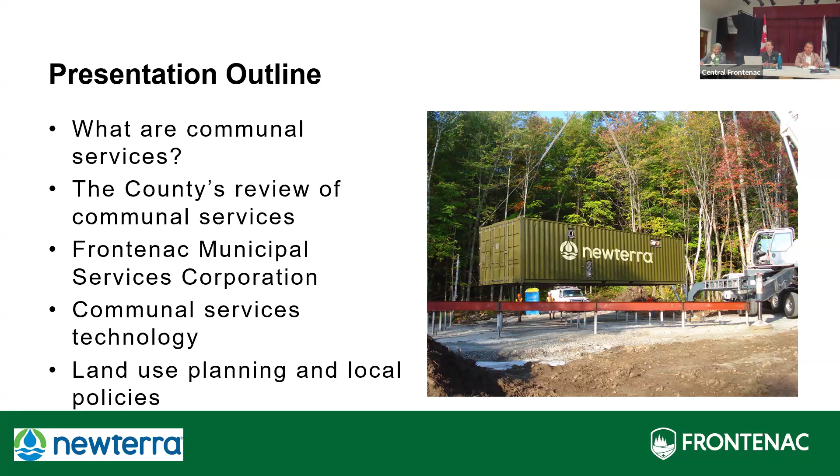I'll turn it over to Brad, who is actually here to talk about the technology itself and how it works. And then our last few slides are going to circle back, and we're going to talk about how we use this from a land use planning perspective and a community building perspective, and the kinds of things that Central Frontenac needs to think about in terms of how it could use this technology in the future.

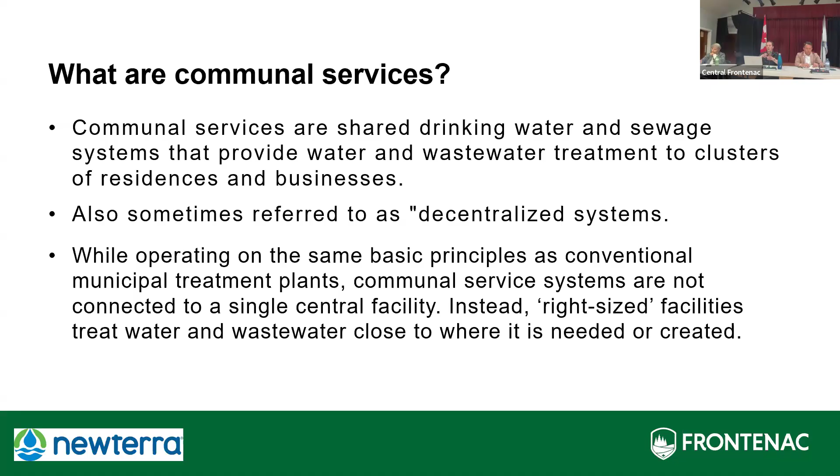So to start off, in terms of what communal services are: communal services are basically shared drinking water and sewage systems that provide water and wastewater treatment to a cluster of residences or businesses. They're also sometimes referred to as decentralized services. They operate on the same basic principles as your traditional or conventional municipal treatment plants, but they're not connected to a large single facility. Instead, they're called right-sized facilities that treat water and wastewater close to where it is needed or created.

Communal services can be less expensive than centralized municipal services, and it reduces the cost of needing to pipe water or wastewater over long distances. They are also more environmentally friendly than your traditional private on-site services, such as an individual septic system.

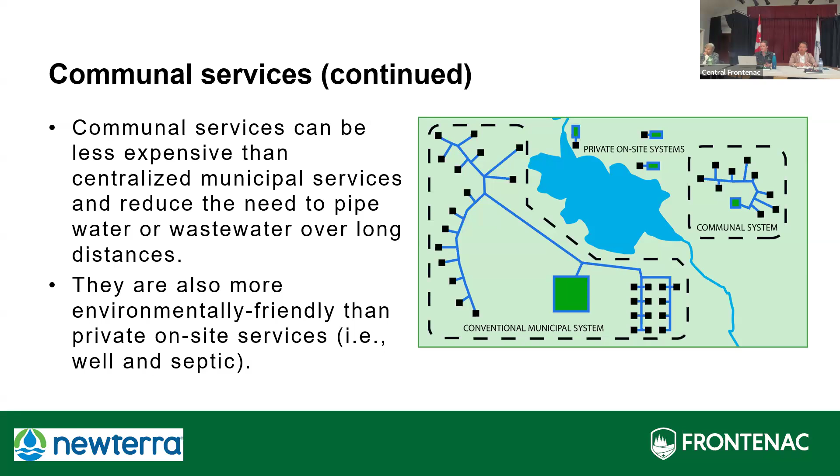So why pursue it? This quote here comes from the County of Frontenac's official plan: the lack of municipal services in our villages challenges the future community viability of those villages. In our villages, we don't have any traditional municipal water or sewer services, save one exception. The village of Sydenham does have piped water, and that came about because of an order from the Ministry of Environment about 25 years ago.

But that's the only sort of piped service that we currently have anywhere in Frontenac. Our historic settlement areas, our villages and hamlets, have building lots like here in Sharbot Lake that are very small. But the modern standard today for a new house with a well and a septic system is to have it on a lot that is at least 2 acres in size, or 0.8 of a hectare.

Our villages and hamlets are also where a lot of our commercial assessment, all of our businesses are located, and a lot of our community services, such as our schools and medical centers. To do traditional municipal services would be a significant public infrastructure investment that, honestly, is too much for our townships to be able to afford.

So the county, over the course of the last 9 years, has been looking into the issue of communal services and reviewing the technology, the policies, the regulations, and the governance models that can be used in order to see whether we can leverage this as a tool to help build and sustain our communities.

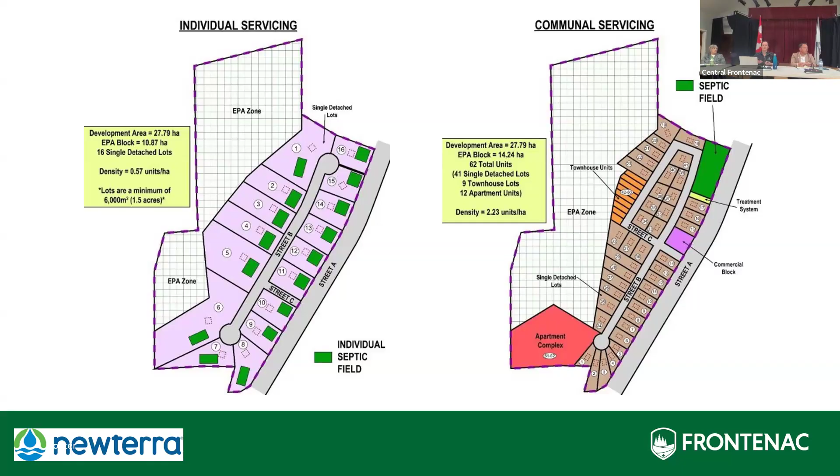In the top right-hand corner is where the communal septic field and septic system would be located for that entire development. So that's just an example we use, based on a real-life site and development, in terms of how we could redevelop it on communal services.

Essentially, in terms of how it all works, there are three main pieces. The first is governance and operations: how is this all working, who is watching over it, who is looking after and taking care of everything. There's the technology itself, which Brad will speak to. And then there's the land use planning: how do you want to use it in your community, where do you want to use it, what do you want to get out of it, what types of housing do you want to get out of it. These are the three main pieces we'll touch on in the remainder of the presentation.

In terms of governance structure, there was a second part to the study the county worked on with WSP, looking at the best way to oversee how this could be done in our community. Their top recommendation was the use of a municipal service corporation. The reason for that, as Brad will explain, is that this technology has been around a long time, it just hasn't been used very often in Ontario yet.

What happens is when a private developer wants to build with communal services, particularly involving permanent residential homes, the province requires what's called a municipal responsibility agreement, or an MRA. These are required when the development will be privately owned and operated, and they're basically a legal agreement between the municipality and the developer or site owner, who could be one person or a condo corporation of people. Basically, it provides oversight at the municipal level for how everything is going to operate.

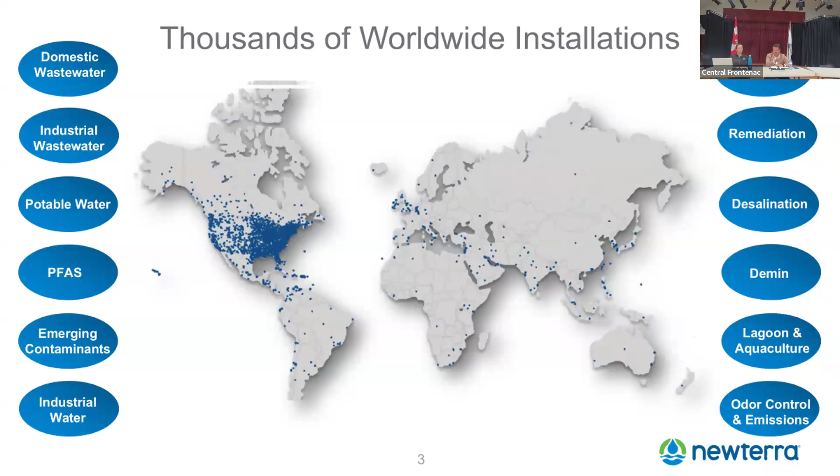We've been doing this for a while, and as you can imagine, over the years companies acquire other companies in water, which we've done. We've accumulated a lot of installations, a little over 10,000 or 20,000 actually installations globally. We have over 100 installations in Canada with sewage treatment, the one I'm going to talk about today, and double that in the US.

So the challenge in Ontario specifically is we've had a surge in population. We have all kinds of water infrastructure that's designed around centralized water treatment. What that means is you have one wastewater plant, as Sonia alluded to. In Kingston, there's a wastewater plant, and pipes go out and collect all the wastewater and bring it back to that plant, and then it treats it and discharges it to Lake Ontario.

So that's what we call a centralized infrastructure, and our province is set up for that. Unfortunately, we're growing at a fast rate, and it's very expensive to expand and grow centralized infrastructure, which is why decentralized, as Sonia was saying, or communal, another way to say it, is another tool in our toolbox for Ontario to help us maintain growth and build out the province.

And the nice thing about being able to have decentralized in Ontario, we have lots of beautiful places to live, and it would be really nice to be able to live in a community like this and be able to grow and have affordable homes for our future generations.

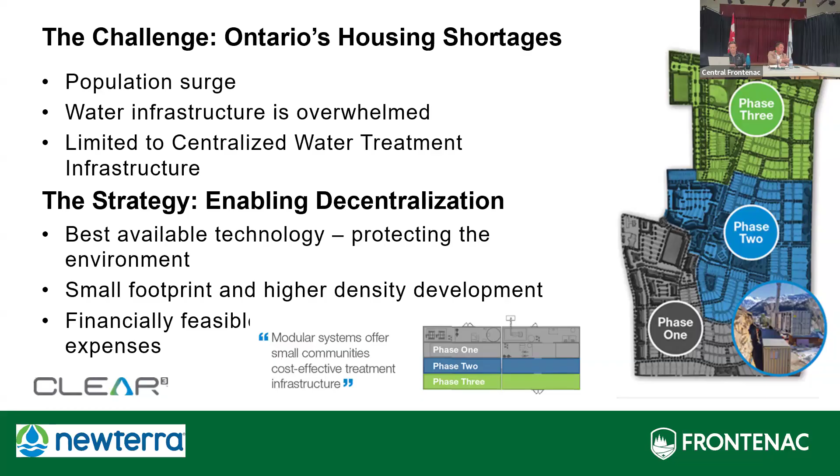I mentioned we have a lot of installations. These are our sewage and some are drinking water systems, most of them are sewage. So we have over 40 ECAs. It's an acronym I'll touch on real quickly, but it stands for Environmental Compliance Approval.

And that's regulated by the province. Basically it's a permit to have one of these plants put on a site where you can treat the water and create a very clean, reusable effluent that goes back into the environment. There's lots of rules and regulations around that and how those permits are given out and how you can achieve to get one. These systems can be owned by a community, by a municipal corporation, by a private developer, a condo corp. So it does vary on ownership. There's lots of options there.

Getting where the mouse is. Oh, is it there? Where do I shoot for this? There's a box right under the screen. Need a laser. Frozen. Can you force it forward? There we go.

I throw this picture in just to give you a little idea of flow. So it's important to understand what we're talking about when we're talking about communal systems. These are not mega plants. These are not $100 million wastewater treatment plants that are going to service the city of Kingston or Brockville. This technology has been around for decades.

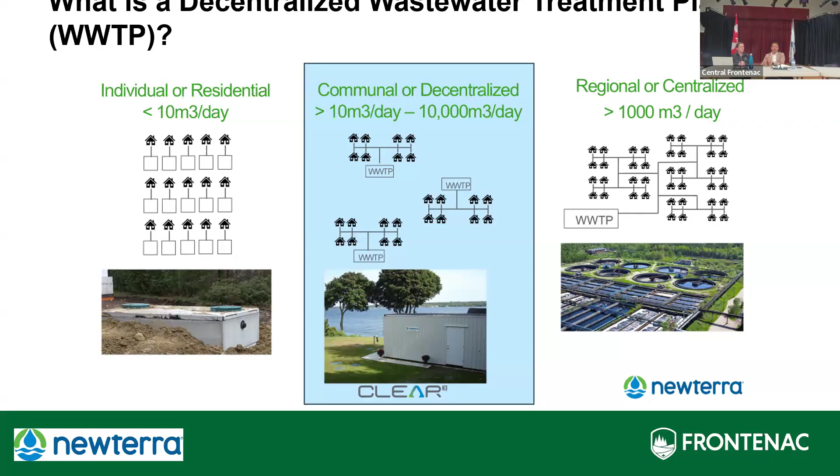So we've taken an existing technology that's been proven, is in operation today globally. It's accepted by regulators globally, and I'll get into the reasons why. And basically we've just scaled it down and put it in a smaller footprint and made these to be built in a factory so that we can ship them out and modularly put them together so that they can scale up with the developments as communities grow over time. Instead of going in and building a $100 million plant, you can put in a small section of a plant and then add sections as years go by to grow that as the community grows and houses are getting built.

This is a picture of a 500 home MBR wastewater treatment plant located near London, Ontario, in a township called Southwold Township, with a brand new development of 500 homes. The system sits down in a valley with a footprint of about 40 feet by 60 feet, plus it's got a little generator off to the side. There's a creek off to the right of the screen that works its way to Dodge Creek, and then out to Lake Erie.

So what happens is the 500 homes have a traditional collection system. You flush the toilet, it goes through a drain, and comes into the system into a tank. From there, we take that wastewater, that sewage, and treat it, turning it into reusable clean water that literally looks like that. We discharge it back into the environment, into the waterways, and it's actually cleaner than the waterways.

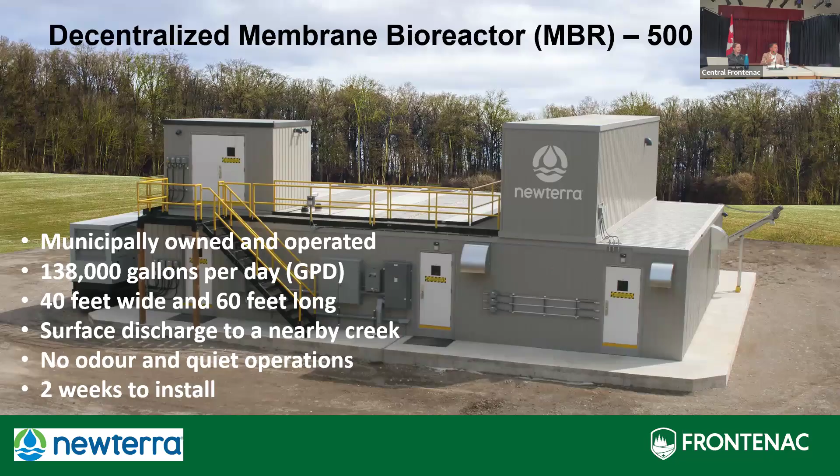The advantages of these package systems being built, as I said, is that they're scalable. It goes together in a few weeks because it's built in a factory, and they are very cost effective when you compare them to septic systems.

Now you might ask, what makes these systems robust? What happens if something breaks or discharges sewage to my precious waterways? Well, that is something that's not acceptable. And the way that is ensured is through multiple levels.

At the very top, we have the province, the Ministry of Environment, Conservation and Parks, the MECP. They issue something called environmental compliance approvals for these facilities. Every single facility in Ontario has its own environmental compliance approval, and one can't be installed without getting that permit. It takes over a year to get the permit, and what the permit does is dictate what the water quality is going to be, what flow rates of water.

So how many homes, are we talking 10 homes or 500 homes? What technology are you using to treat the water? I'm actually talking about the best available technology on the market, not just because it's Newterra's - MBR is not Newterra's technology. This is a generic technology that's been around for decades, but we've adopted it and put it in a smaller form factor.

But if you ask any regulator globally - the US, California, Ontario, or Singapore - they will tell you MBR is the best available technology for treating sewage, period. The reason it's the best is its effluent quality, the output of our system. As an engineer I always use technical words, but basically the output is clean water that we're putting back into the environment.

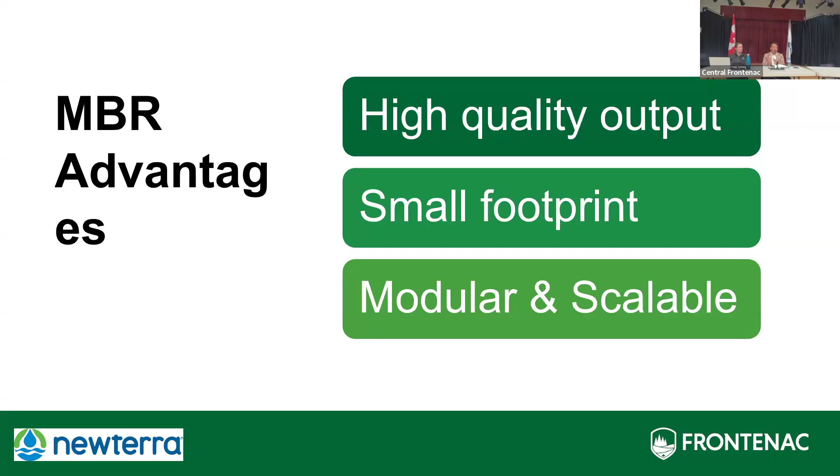So that was the key, being able to scale these up as housing developments go and align capital costs, the cost of that plant, so that it doesn't burden the new homes that are being built today. And when you do build more homes later, that cost to build those new homes still aligns with that new phasing of the next part of the development.

The process is very simple. We start with the first thing you do when you flush the toilet, all your toiletries go down. It goes into a tank, and then sometimes it goes into something called a screening process. We use a mechanical screen and remove all the toiletries, all the inorganics, things that aren't going to break down - shoes, believe it or not, T-shirts, we get it all. But we remove all those first, and then you're left with sewage water, as you would expect.

Then that goes into the equalization tank, and that goes up and down with the flows of the day. So as people in the morning are using lots of water, having showers, making breakfast, that tank is designed to fill and not overfill for those peak times. We design that based on the flow because we know that before we built the plant.

The next stage is we move that water to a biological reactor. That tank always stays full. It takes about 8 to 12 hours for the drop of water to move through the entire process from the front end all the way to the back end. And part of that is because this is Mother Nature doing her part in the way they break down the sewage.

In the biological reactor, we use bubbles. When you use small bubbles, we can put oxygen in the water. And bugs in the water - they're naturally in our stomach, they're in the sewage, they are there - activate and become active when there's activity. So the bubbles put oxygen in. If we have 2 parts per million, that's just a measurement of how much oxygen you can measure in the water, they're very happy. They also like warm temperatures, anything above 12 degrees Celsius - warmer the better, just like us. They also like a balanced pH, so it can't be too acidic. We control those 3 main parameters in this biological reactor.

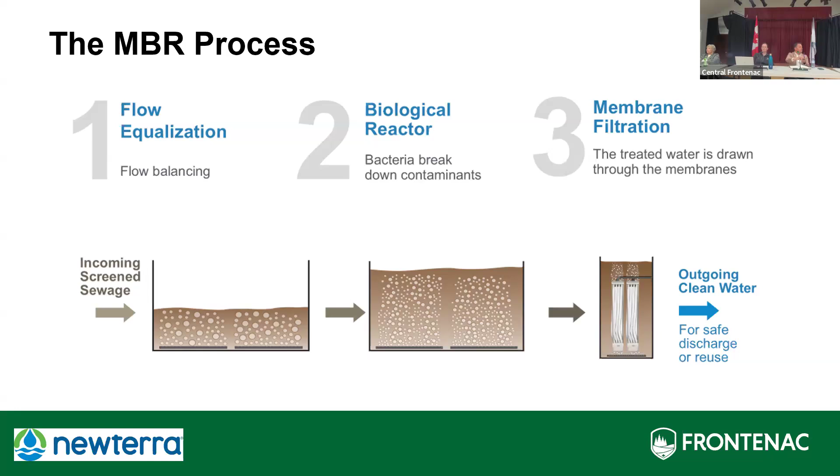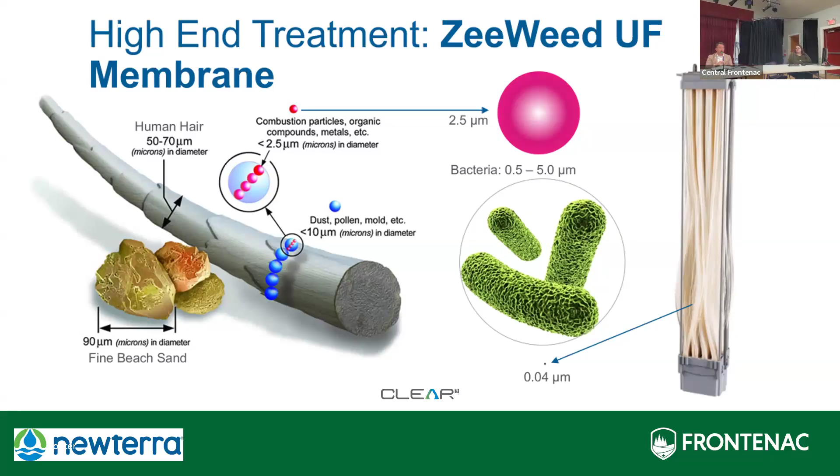So in order for a drop of water to get past this membrane, it has to go through that tiny hole into the hollow of the straw as it's being sucked out, and then out through to the river or the stream that it's going to. With that, you are left with a very clean output that is reusable to the extent that you could take it to the next level of polishing it.

This is what it looks like. That's the dark chocolate milk on the left side. Those are all the measurements you could measure wastewater with, things like biological oxygen demand, total suspended solids, total ammonia nitrogen or total nitrogen, total phosphorus. Phosphorus, you might have heard, is not one that we want in our waterways. So this membrane is able to reject all of that.

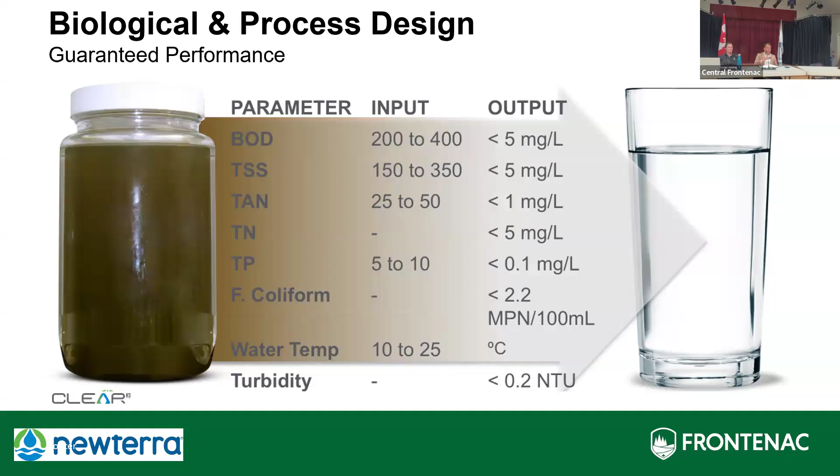We treated it, we put it through something called a reverse osmosis. You might have one under your kitchen sink - that's what I was saying, I say polish, that's what I mean. We just polish it. And then we had our board of directors drink it. And I know they are still all good.

So from a technology standpoint, it exists to take water, wastewater, sewage, and turn it into reusable clean water. Now, obviously drinking it - unless you're on a space station we wouldn't go to that level, but you can. The systems are small, very compact, they're scalable, and this is what one looks like on the inside.

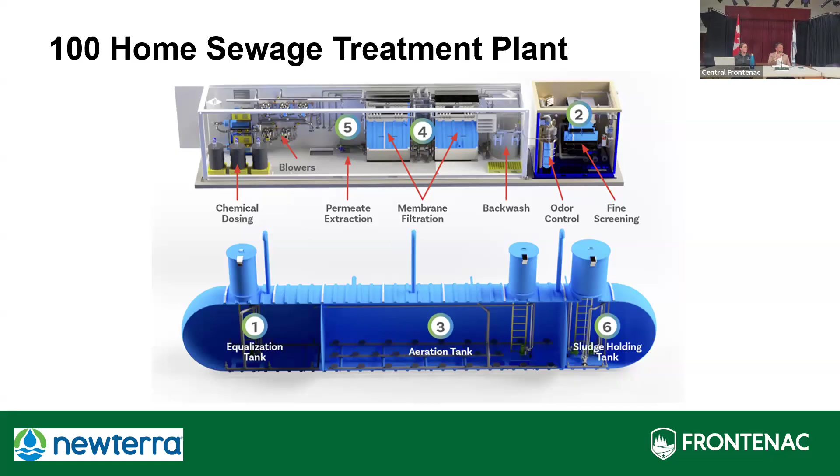And then it can be used as fertilizer or go to a municipal plant, so that gets hauled away. Really, the only output of this plant is clean water, and the rest gets hauled away to either landfill, fertilizer for farms, or other applications like a wastewater plant, a municipality. But it only has to be hauled away once every 30 days, roughly.

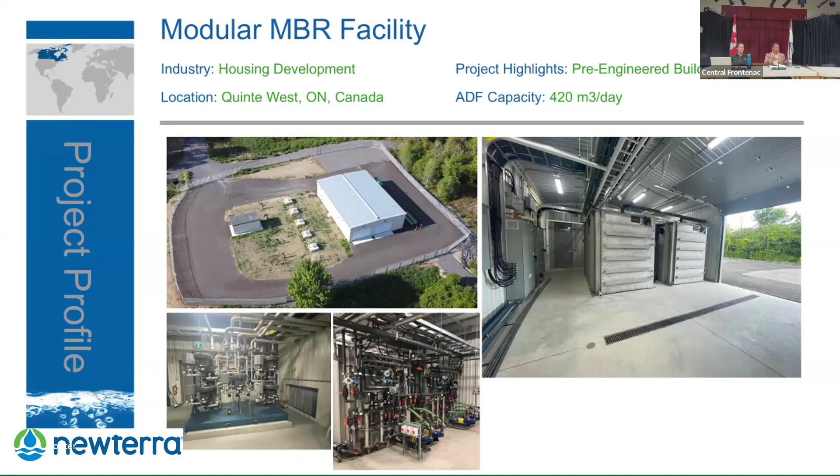Same concept, same idea, but essentially the developer came in and said, we want to build 500 homes. Quinte West said, we don't have the capacity - you couldn't even run the pipe, it would cost $20 million to run the pipe. We put this plant in for a fraction of that, and the developer bought it and gave it over to the municipality. The municipality now runs it as a utility. They have 500 homes to collect taxes from, and a wastewater plant that's been running for 7 years.

Same idea - this one's actually in St. Thomas, an Amazon warehouse. Amazon's got about 1,500 people working there. Same situation - they didn't have servicing. We were able to put down a system to service the plant, and it handles all the different peaks and variations, because at Christmas time there's a lot more workers.

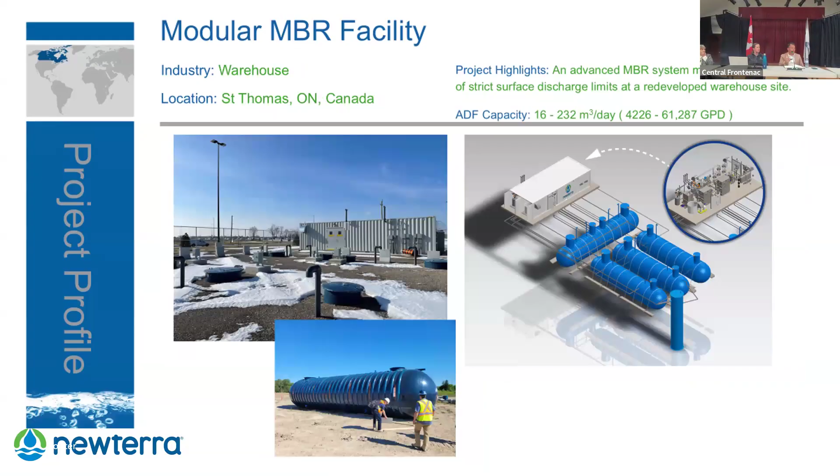This one's in Lake Muskoka - that is actually Lake Muskoka, and we're discharging into it. The water coming out of this plant, as I said, is cleaner than Lake Muskoka.

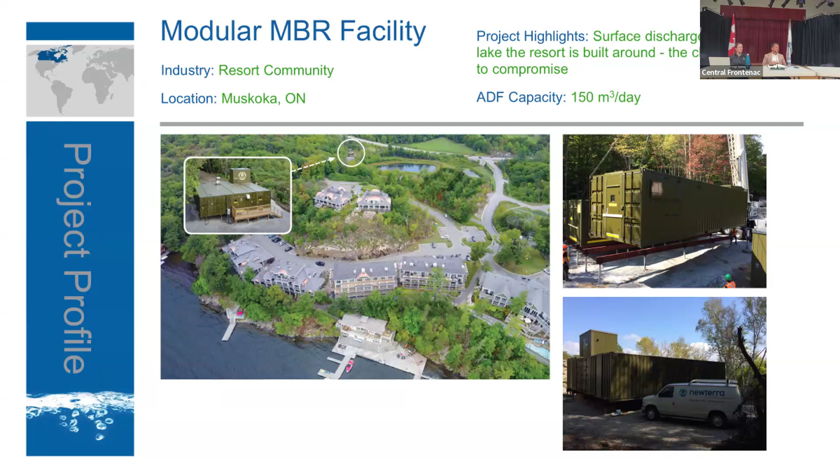This one's in the Quinte area as well, or Consecon I guess. It's an RV or mobile home park, and it's been in operation for a number of years, I think since 2015.

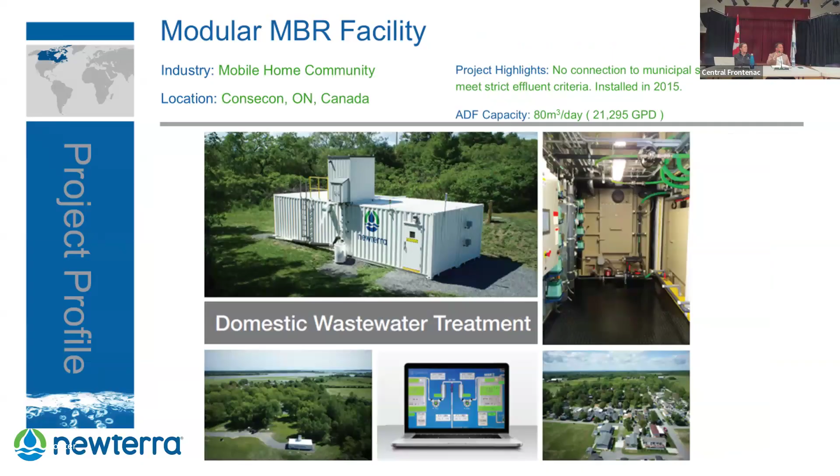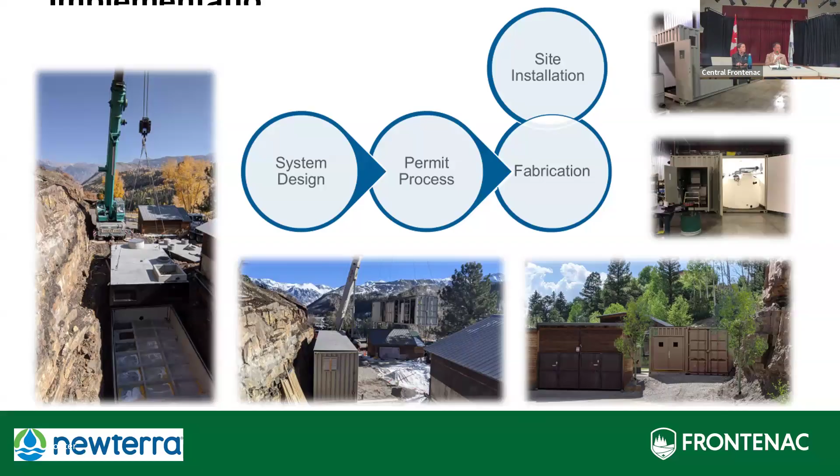So process-wise, from a system perspective - having all the permitting in place, having a system designed and built and set up on the facility, and then fabricating and starting it up - it is a very short process compared to a traditional build, if you were building a mega plant, all within a year or two at most.

And then ongoing operations - these systems are designed for 35, 40-year lives. They're all stainless steel. There's nothing magical in these systems. The most unusual part is the membrane itself. All the pumps are small little pumps. Everything in there you could Google and find that part and order it yourself. There's nothing magical inside these boxes. We've just gotten really good at designing and packaging them so they operate and last a long time. Operation companies like Clearford and Utility Corps will be able to operate them very easily - they have telemetry in them, so it's easy to get information and data.

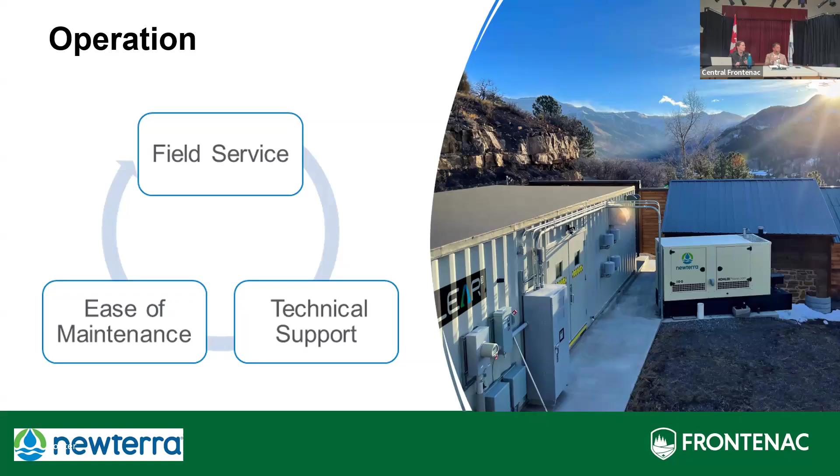I think that's all I have.

Great, thank you Brad. We just have a few more slides here. I want to talk again about the land use planning and community building perspective. For us, communal services really is an opportunity to do sustainable rural community building, particularly for our villages and hamlets, because you can't even do infill or additional residential units on the small lots in the villages because of the existing servicing. So there is opportunity for our villages.

The first example I'll reference is the housing master plan done for Verona, just a little ways down the road. This is being led by South Frontenac Township themselves. It's a mix of townhouses and apartment buildings, and they're looking at anywhere from 70 to 100 units. The final number will depend on the design and the servicing capacity they have to figure out through the environmental approval process, and they're in the final stages of that process.

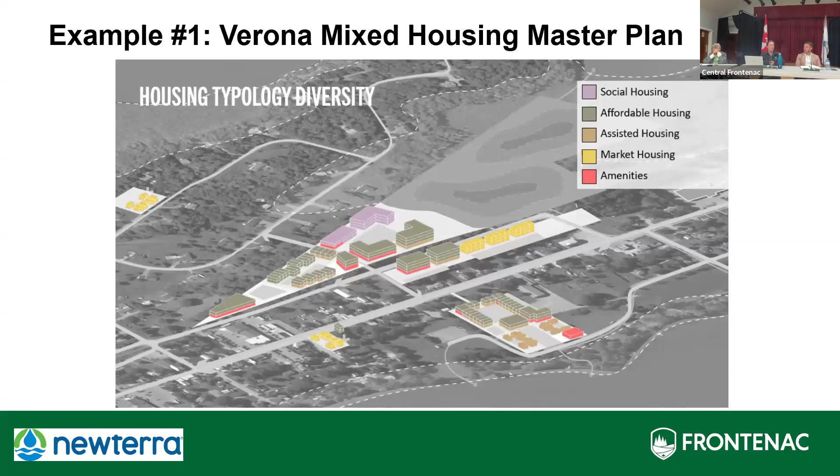The other example, probably very familiar to people in the room, is the Sharbot Lake School site, basically next door here. It's a 2-acre site right in the heart of the village. The township had purchased it with the intent of doing seniors housing, 8 to 10 units, using the existing well and septic. As the county was working on the communal services study, we said, what if we use communal services?

So we worked with the township and got funding from the Federation of Canadian Municipalities to do a feasibility study. Some of you may have been present for that presentation, but that study determined that using communal services, you could have anywhere from 45 to 50 apartment units on that site.

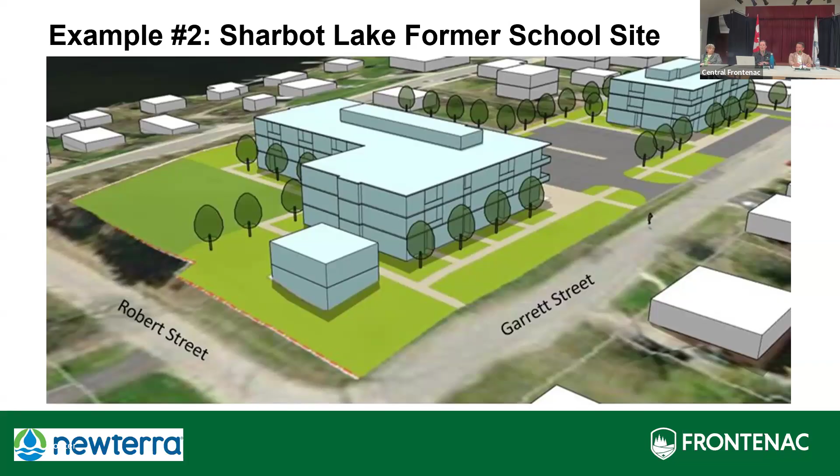I will say right now, no decisions have been made about Sharbot Lake. There's still technical work that needs to be done, decisions to be made by council. But this is an opportunity for Sharbot Lake to be able to utilize communal services to the benefit of the community in the future.

So in terms of our official plan policies, like I mentioned, the official plan that a municipality has is basically your blueprint for how you're going to grow. At the county level, we amended our official plan to talk about communal services and to provide direction to the township.

So the first thing that we had said is any new residential subdivisions, actual neighborhoods that are going to be in hamlets and villages, need to be on communal services wherever feasible to be able to achieve a compatible density and to fit in with the villages.

Townships can consider using communal services to service existing villages and hamlets, including doing any kind of Main Street improvements. And we also want it to be the primary servicing method for any new large-scale commercial or industrial developments, as well as any business parks.

So that's another development opportunity we haven't seen much of, where you have a business park and a collection of businesses, because everybody has different servicing needs. Being able to do it through communal services offers an opportunity to do some different business type developments than what we've had in the past.

So in terms of the township official plan and the conversation we want to start in the community, there are a number of things we have to address, and these are the kinds of things we want people to start thinking about in terms of how you want to use this.

So are you going to use these for your hamlets and villages? Is it something you would want in all of your hamlets, or maybe just some of them? If so, which ones and why?